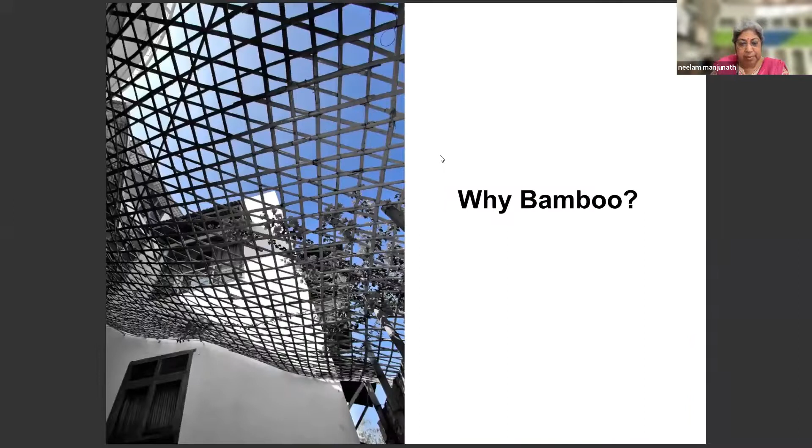This is a question that everyone, and I think most of us in the bamboo sector know, but in the architecture sector, buildings are actually the biggest polluters. As part of green buildings, we are doing very little, only 5.7%. That's why we probably need much more different kinds of materials.

Housing is another very big problem we are supposed to be addressing. Our Prime Minister had said by 2022 we will have house for all. Unfortunately, this 'house for all' has more of us talking about pakka structures, which always talk about concrete and steel and not about mud and bamboo. When we try to solve the housing deficit with concrete and steel, we don't have enough resources.

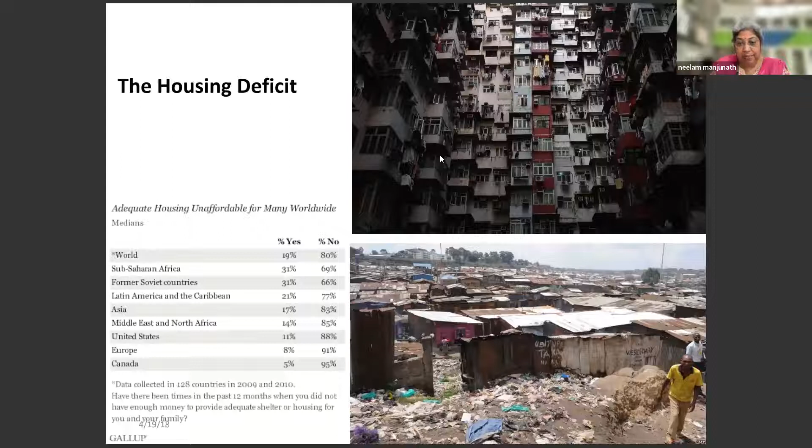Bamboo is a traditional material, so most artisans and people have known this, and know how to work with the material. So it's very easy to reintroduce. For us, it is very easy to reintroduce the material because, though the skills are slightly forgotten and there's a gap of some time, through my experience I have seen that they can be worked upon again.

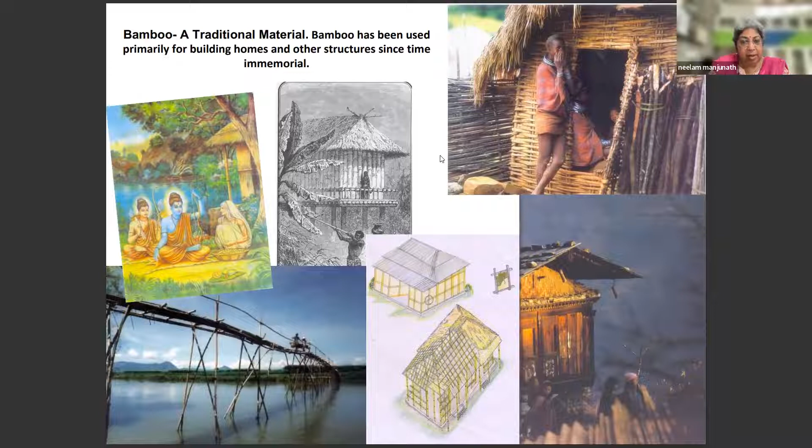The other various typologies in different countries—these are actually all from India for that matter. We have from northeast to Kerala to Assam to Andamans, these are all different kinds. So natural materials will always have different typologies.

Unlike cement and concrete, where one typology fits all is generally the mantra—a universal or global solution—when we use natural materials and natural technologies, we really have to be very regional and very respecting of that, so typologies actually change.

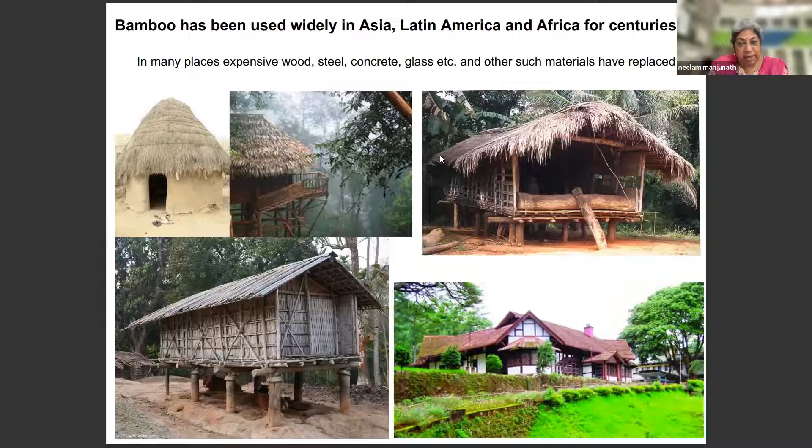Some more typologies: the bottom left one is from Kerala, the right one is from Nagaland, and the top one is from Gujarat.

I will not go much into detail, but as I said, bamboo grows very fast. It is locally available in most parts of India, and even in most parts of the world, except for Europe—and there too it has been sensibly introduced. The energy for transportation can be saved if we don't have to transport the material for far-off distances.

It's light and hollow, very flexible, very good in tension and compression. Its tensile strength is very high. It is prone to splitting, but that makes it easy to turn into mats and other boards. Because of that, it has better thermal conductivity than even wood. Its outside skin is very hard because it's got silica, so it protects against various kinds of diseases and other onsets.

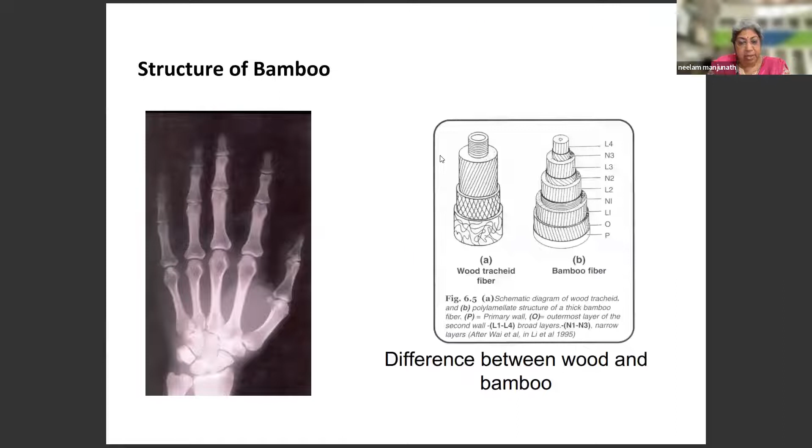These are the structures of bamboo. I think you can run through these. We will just quickly go through examples of bamboo and mud multi-storey buildings from India, different types of it.

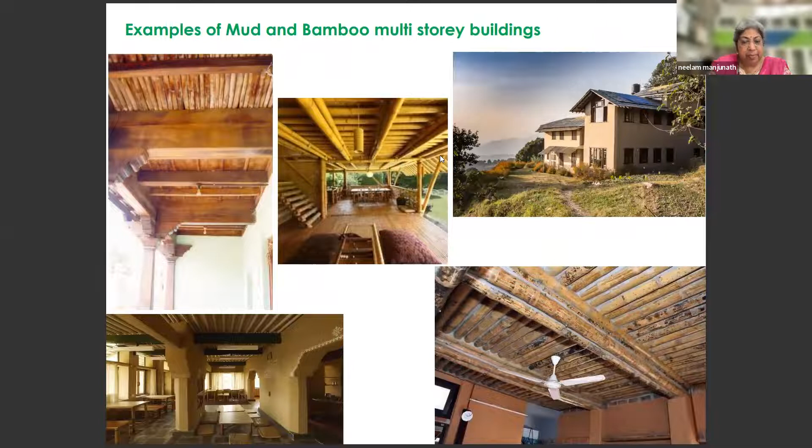This is an important slide telling us how sustainable bamboo is. To produce one unit of building material, how much energy is required - that's what we call energy balance. As we can see here, between steel and concrete, steel and bamboo, steel and wood, you can see the kind of ratio we have - steel being 1,500 and bamboo being around 30, almost 50 times less.

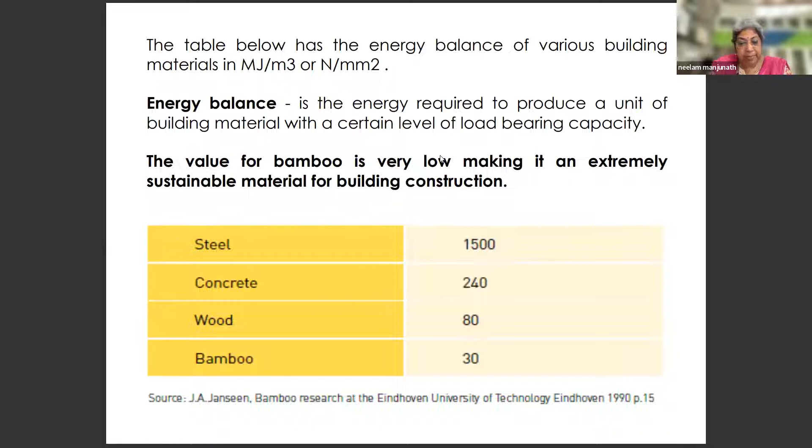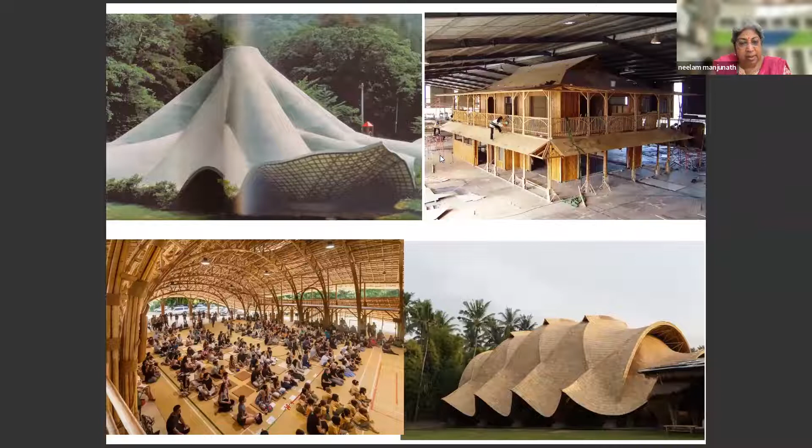These are from Simon Velez and Vo Trong Nghia from Vietnam and China, two different places, and they have been using bamboo for various kinds of purposes.

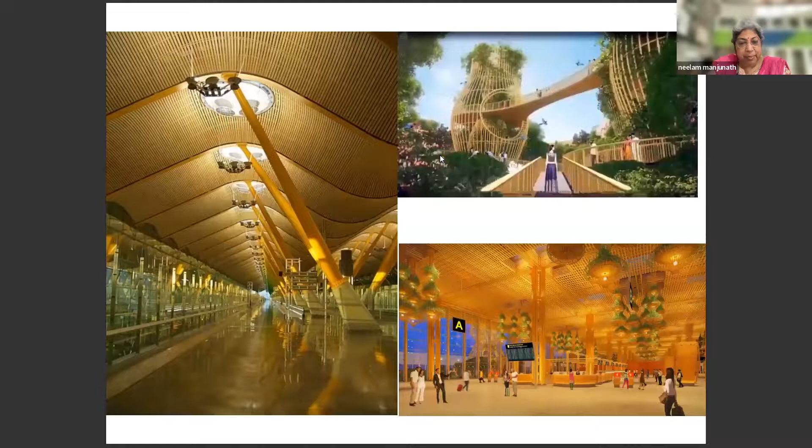The left one is the Madrid airport by Richard Rogers, used for the false ceiling. The next bamboo building on the right bottom is the Bangalore International Terminal, airport terminal, which is going to be finished and inaugurated very soon, with a lot of bamboo used in the interiors.

I'm very happy to share that I was part of the SOM project - the first time they reached out to me in 2017, they wanted to know whether bamboo could actually be used for a large transportation project like an airport. We had Ben Calden and Blake Sooth, who had contacted me, and for almost 2-3 months they sent these designs to me. We talked about fire resistance and other properties of bamboo, and availability of bamboo in India. They told me they would get back to me once they convinced the client with the data I provided.

And I'm very happy to see that they didn't get back to me - well, not very happy to say, but I'm happy that the building has come up with a lot of bamboo used, though not for structural purpose, only for the interiors. Nevertheless, this will be the largest usage of bamboo in any one particular building, other than Madrid, even more than Madrid actually.

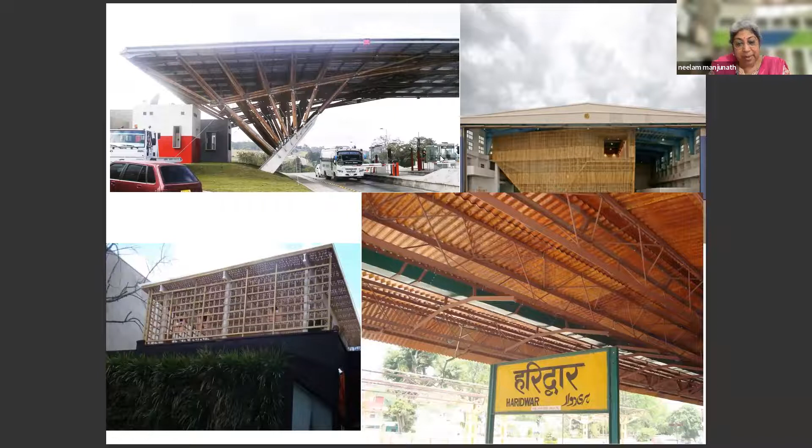In interiors, bamboo has been used for different kinds of purposes. It is being used for lots of applications, and traditionally it was also used for bridges - even now they are used.

So this is how we have done it - design, test, document, design, test, document. This is what I have been doing since 1999, from my first project onwards.

I will request Tejas to quickly run through that, because then I would like to talk about bamboo more. This is my first project, at the Raj Bhavan in Bangalore, a small pantry building and a toilet made with bamboo and mud.

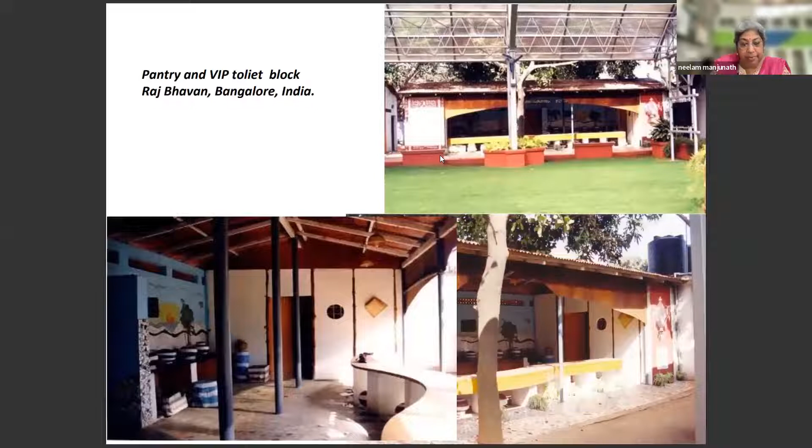This was done with IPIRTI, where we did this 2 BHK house. What I'm trying to show you through these projects is the variety of ways bamboo can be used, although it is not being promoted in that manner, which is what I feel. Because of that, we are not able to mainstream bamboo, and that's why I keep running through these projects every time I speak.

So this is a house, done in 2003. It was finished, and a lot of people have visited this place. They are using it as a club.

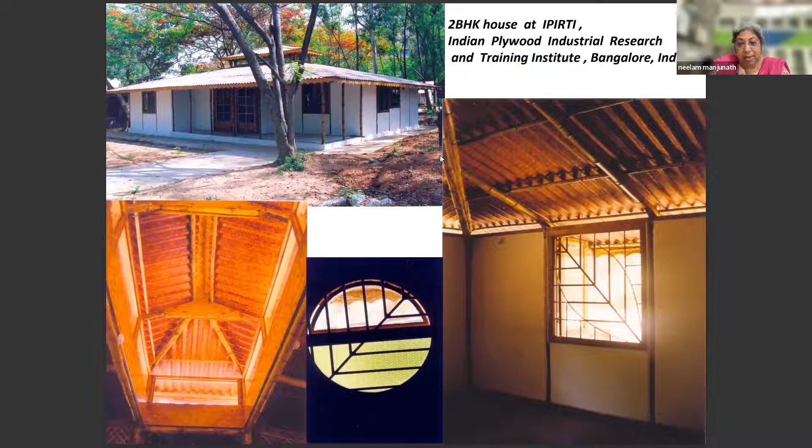Same project. This was 2004-2005, after the tsunami. With Seeds India, we did this prototype with bamboo and mud, and also with coconut trunks, since a lot of coconut trees had fallen, and we thought it would be good to use them in the building.

This was not built by us; we did the training. Bamboo can be used for disaster management, as an interim measure, and also as a post-disaster rehabilitation program in a very effective manner, though that part is still not exploited properly. We spent a lot of time with the Planning Commission to introduce this, but somehow we were not very successful.

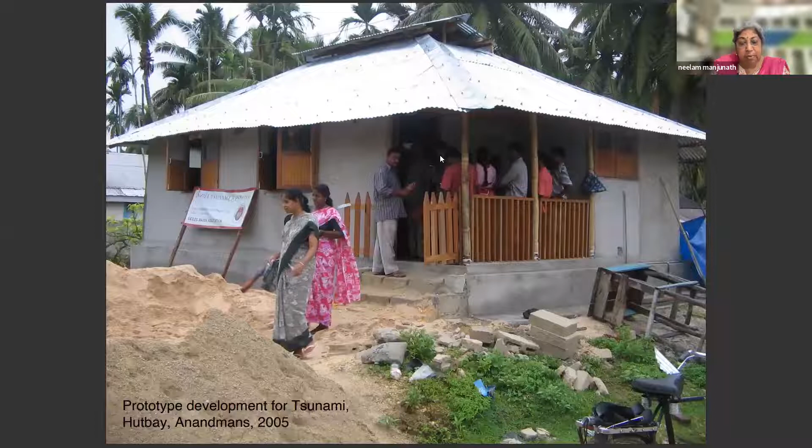This is the energy park, which is no more, thanks to permanent buildings taking over the whole campus. Everything here was done with bamboo, because it's a low energy material, and since it was an energy park, we tried to use that. A lot of people would visit, and this was supposed to be a showcase of the versatility of bamboo.

So we did bridges, and many different kinds of structures — even furniture, a waterfall, a chandelier kind of thing, sofa, dining table, bed, all the furniture we tried to make. Also different kinds of gazebos, bamboo used in landscape, and bamboo-crete — very different usages of bamboo that we tried to showcase in the whole energy park.

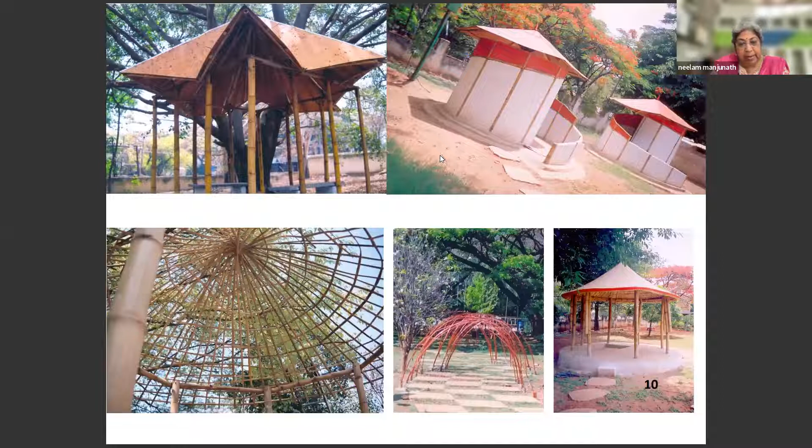From 2005 to 2010, we had this bridge that we built for Yamuna Biodiversity Park in Delhi. It is still existing, though slightly shaken, but it's still there. This was about 50 feet, and along with this we did other structures as well.

This is a toilet block, and we also did a gazebo out there.

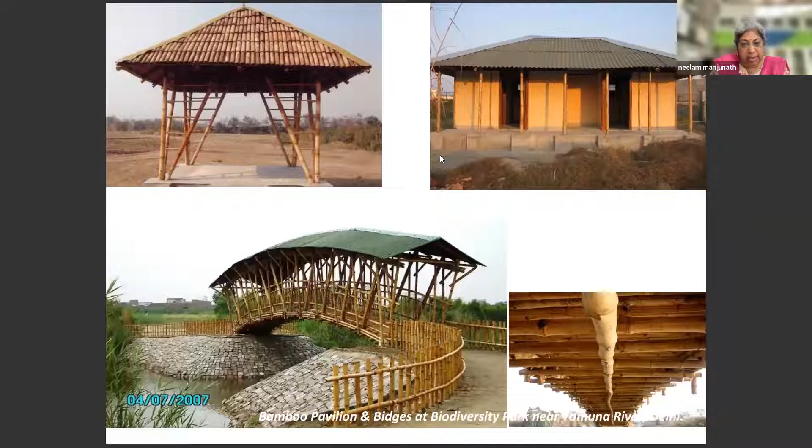This was a competition, and after that I think this project was abandoned. This is a shell structure. I started imagining this because bamboo is a very lightweight material, while people were using high-energy materials to cover large structures and large spaces. So I thought, if we can do it with bamboo like a shell structure, we would be saving a lot of carbon emissions. That's where I proposed this — we were the runners-up for this particular competition.

This is the way the whole thing was set up — it is part of a lake which was filled up.

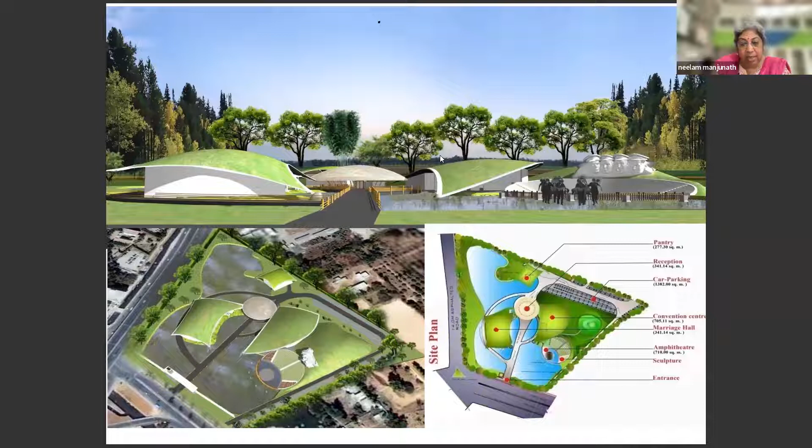And so we had a proposal of rejuvenating the lake and making it into islands, building on the islands for that. Next, this is, I think, the only bamboo museum in the country, in Palampur, Himachal Pradesh.

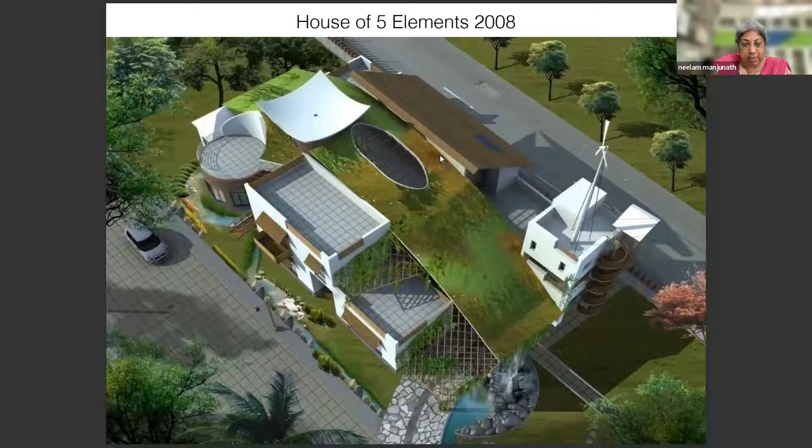This is my House of 5 Elements, which I built in 2008, built with stone, mud, and bamboo. These are three materials which are available everywhere, so I have been trying to develop a vocabulary with this material of our architecture.

These are the photographs, you can keep running through pages. This is all mud with lime wash and bamboo. Bamboo is there in all different kinds of forms in this house.

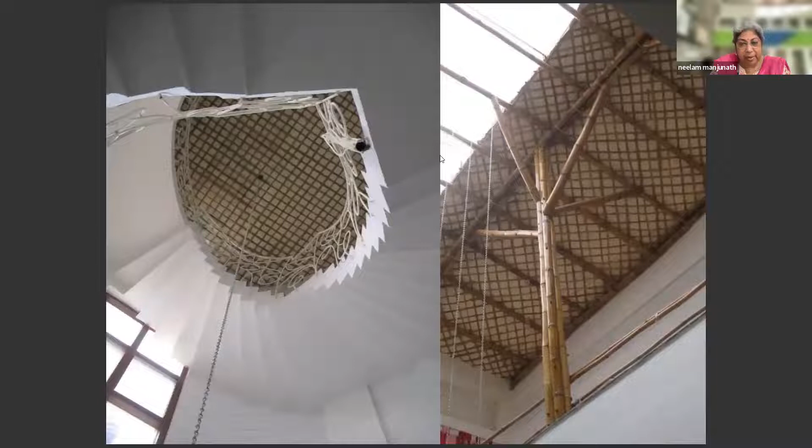From pergola to roof to bridges to different kinds of things. The first floor, the flooring, the walls.

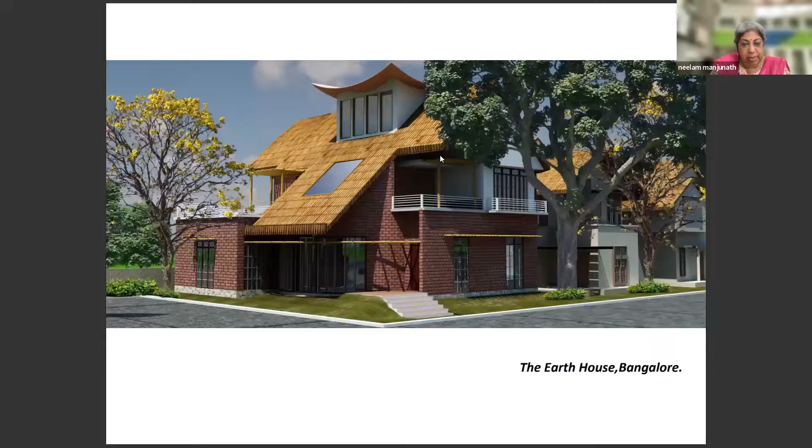The furniture. This is another house in a similar manner that has been done on the same campus, again with the same vocabulary, mud, bamboo, and stone.

In Bamboo Symphony, in 2010, we did our office from all the waste that we have from my house. This is Bamboo Symphony. In my house I had bamboo outside, there's a whole big shell roof that was done in my house. In the office, I have done a free-form roof with bamboo as reinforcement inside the slab, so what you see there is a free-form slab.

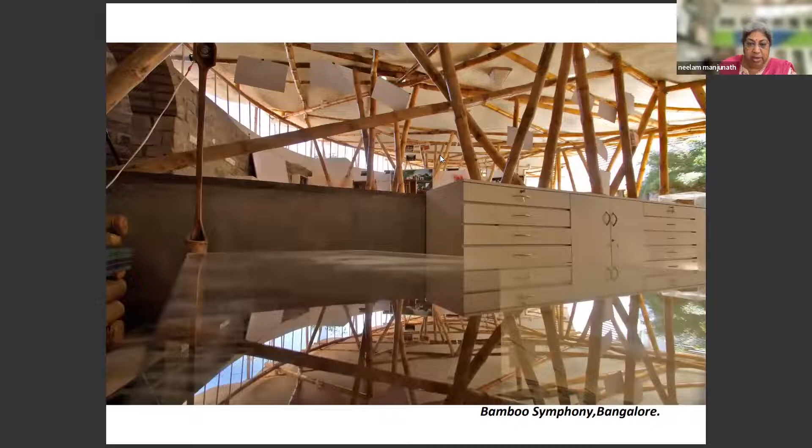Yeah, so that's the office. It's an open office. All these bamboos that you see, this is not part of any interior. These are all structural members in the office which actually carry the load.

And if you have seen, the slab is actually 4.5 inches, it's not a thin slab as well. So all these slender looking dancing bamboos actually take the load of a proper free-form roof of 4 inches over them.

Yeah, these are some other shots.

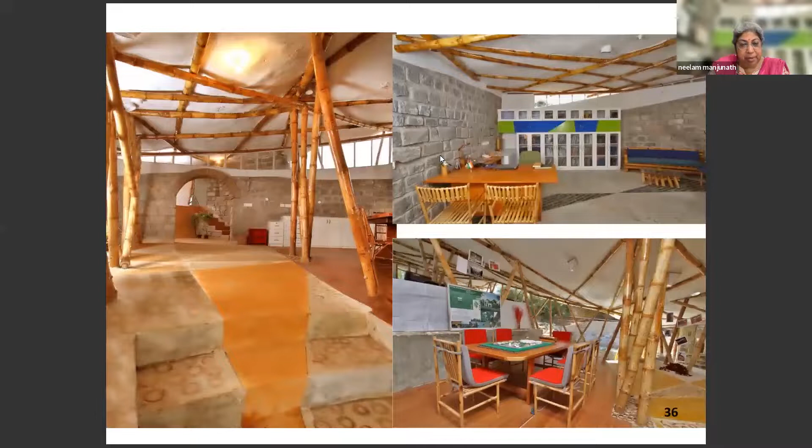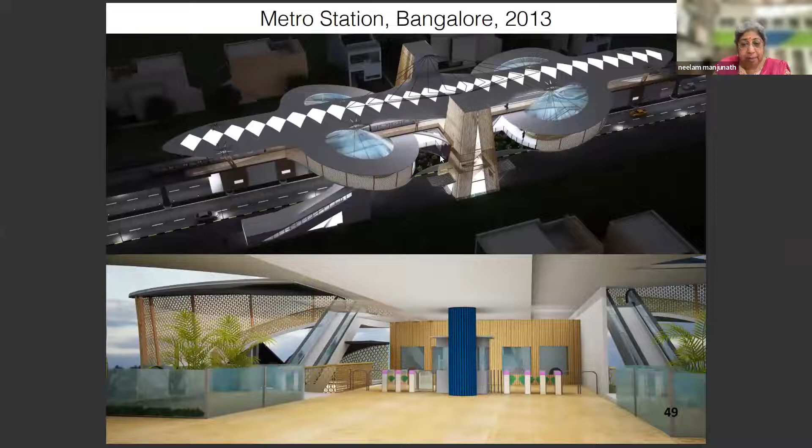By this time, we had sort of matured in the way we thought, and we could almost go further. So we were invited by BMRCL to propose metro stations with bamboo in 2013, and this is one of the proposals which also won the Rethinking the Future award. We had a lot of discussions, but after that, in the fire audit, they actually rejected bamboo, something like that, by the technical director, though the chief engineer was convinced, and it did not happen.

Just to mention, there were three different options that we had proposed, and this was with the debris that they generally produce a lot of from underground tunneling and things like that. With that, we also thought to use it with bamboo. So mud, debris, construction waste, bamboo and stone, that was the kind of material palette we had proposed for this.

As I just shared, this project is still under process and pending, but the other proposal for usage of bamboo in the Bangalore International Airport by the same government has been cleared. So I would really like to pursue this further, because now we have a case that we can use bamboo for public buildings in a very large capacity.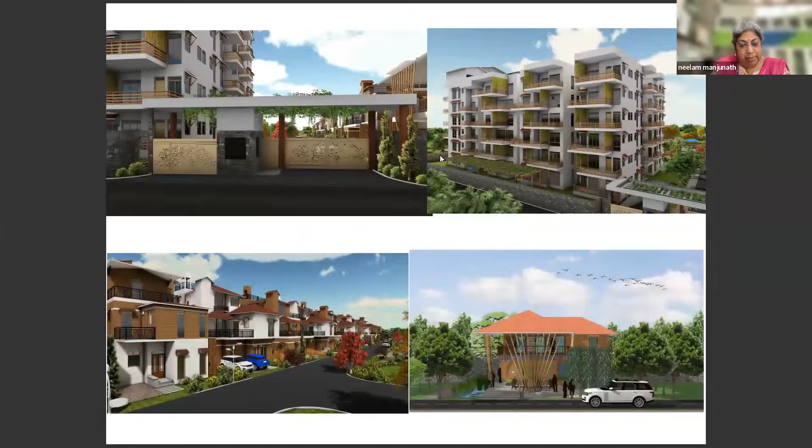This is a project which is going on. A lot of work is already done, this apartment block is already up. The photographs have not been put in here, but our clubhouse is about to go up.

This is Avilala Ecological Park, this is from the Andhra Pradesh government. Actually we got this near Tirupati, and we got it through a tender with architect Ravi Kumar, landscape architect from Chennai. Unfortunately, I think after Chandrababu Naidu went, the project has been slightly slowed down, and I'm hoping that soon this will again take off.

But here we had designed an interpretation center, which is like 30,000 square feet, what you see on the top. And next slide, we had this tower, which is a 150 feet tall tower that we have designed, and a skywalk, which you see at the bottom left, which was more than 1.5, actually 1.7 kilometers long.

So again, a shell structure. This is a shell.

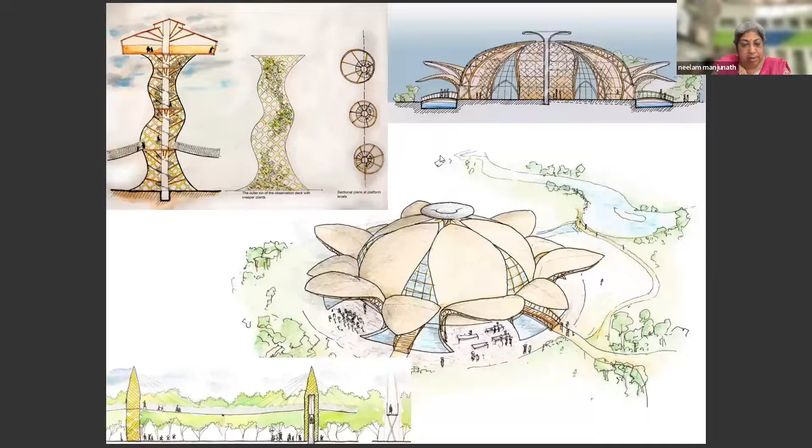This is again a live project, Metaslum, for the Bangalore Slum Development Board. We had taken a very different way of building, and bamboo is again a part of it.

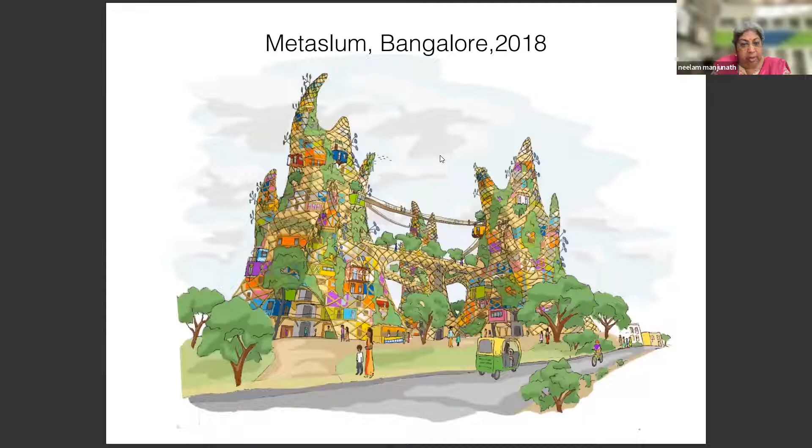We have a core, where there's a core of the lift and the staircase, and the slabs are done. After that, the spaces are given to people to build their own structures, through training and through the way they do in villages and other areas. That's how we thought they should also be building their own and covering the spaces, half covering the spaces, as they feel comfortable.

So this was one proposal. This also got a Rethinking the Future award for us for this slum development project.

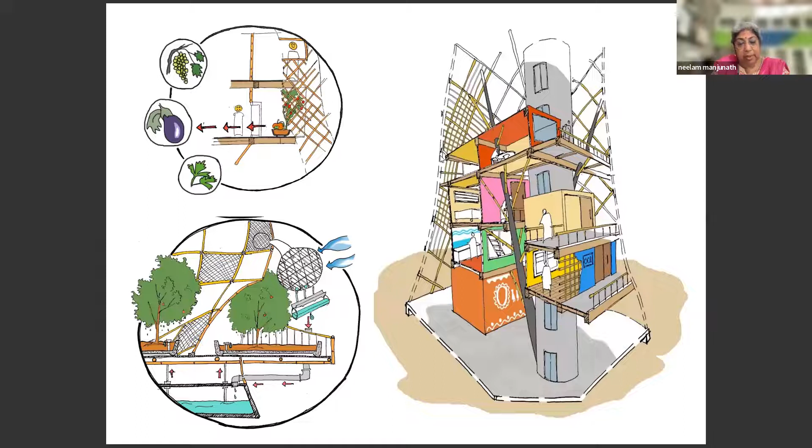This is another project where we went through a tender, in Anantapur, and it is going again slow. The project has been approved. This is for Shilparamam, the way it is there in Hyderabad, and the government wanted it in every district to promote the kind of handicrafts.

But we said, since buildings also need the whatever was the craft when the building was being used as a craft, it should also be promoted. And this is where we actually started the whole thing.

Next slide. Yeah, this is the interpretation center, which is a 20,000 square feet building with rammed earth and a free form roof from bamboo.

These are projects where you cannot use other materials, so it was very nice for us, because we had a very fulfilling time designing it with various natural building materials.

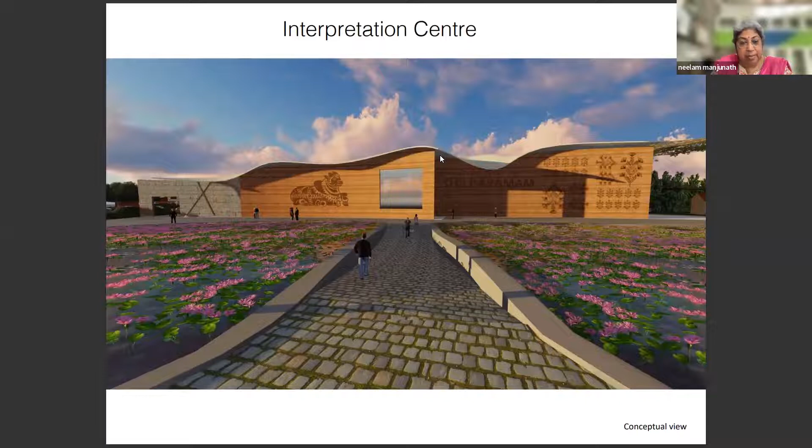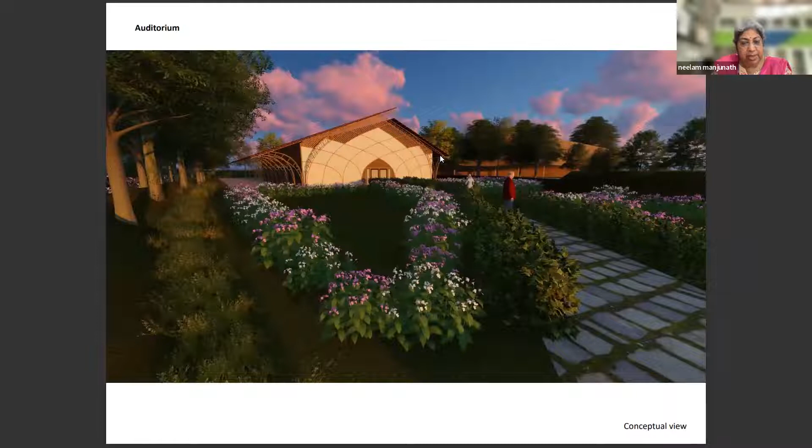This is an India Pavilion we did for a World Bamboo Workshop in Imphal in 2019. This is again, we tried a very different kind of roofing option on a shell, which has a 9 meter overhang on one side, and 7 meters on the smaller one.

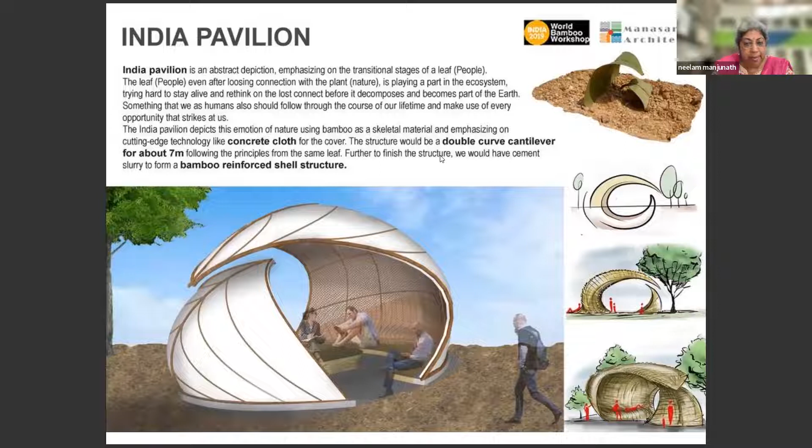This whole thing was done with a very different kind of roofing that we have tried here, with lime and jute, the jute fabric, and cement slurry with lime. And this, if you believe me, is 7 days work.

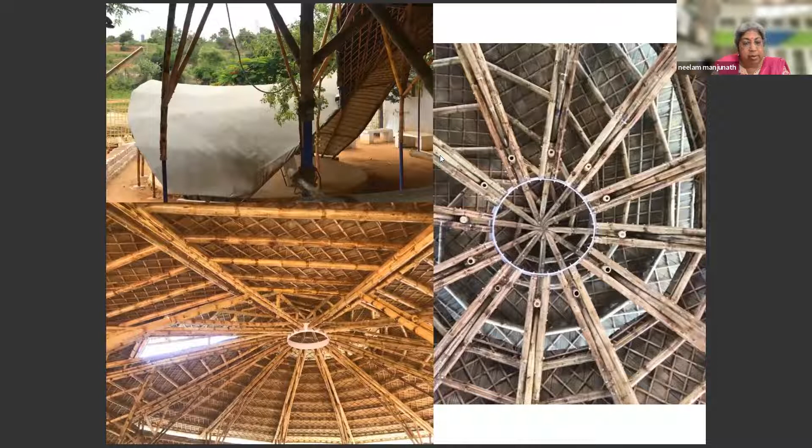With Dayalbagh University, from 2003, we have been doing a pedagogical journey, because we are more into advocacy. As much as we are in the building, we are also into advocacy. So it's more like walking the talk and talking the walk. It's not just that you talk about it, or that you get into business, but you also take people along and try to promote it in different sectors.

And that is how we try to do it, so with Dayalbagh University we have been doing this. The first structure, which you see on top, was a proof of concept for the university to start courses at the place. The left side bottom is the Agriculture and Bamboo Center. The right one is the Amritsar guest house at their university campus in Amritsar.

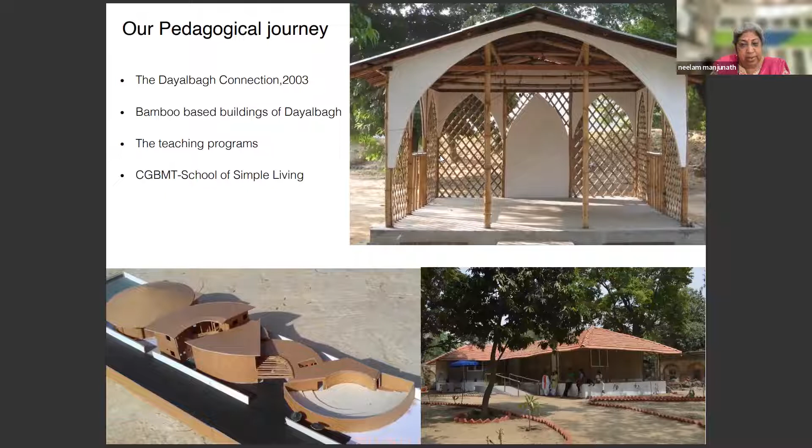This is the Amritsar campus. This whole guest house that you see is around 2,000 square feet, and that got completed in 18 days.

This is the state we did with mud plastering, mud flooring, and all these kinds of things. In 18 days flat, we did this whole construction, including solar tracking and all other furnishings that you see. Just to showcase how quickly we can actually do it, especially in terms of disaster housing, where people show very poor kind of construction that needs months together, this can be very easily done to a very nice finish in very short time if it is planned in a proper manner.

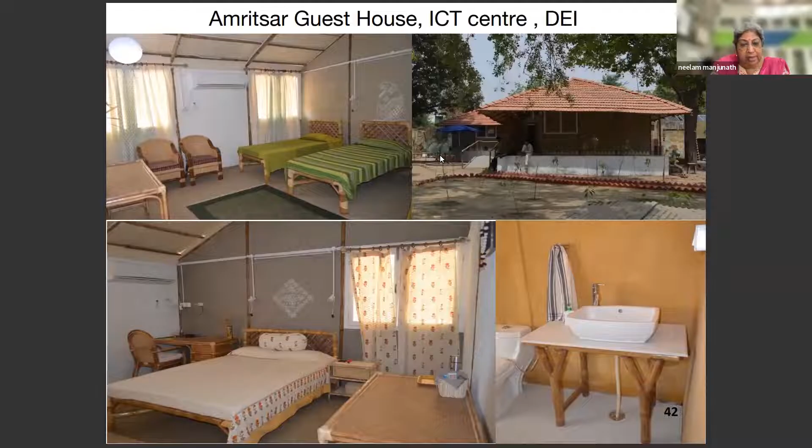This is a crèche at Dayalbagh University.

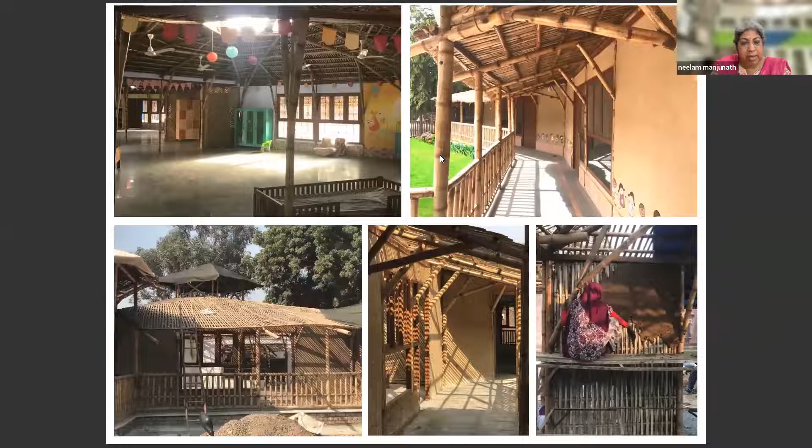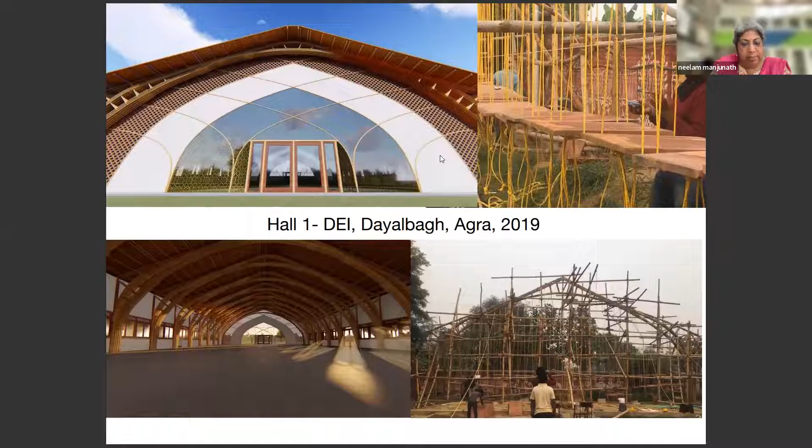In Dayalbagh University itself, we are doing two conference centers. This is the larger one, around 9,000 square feet in a single hall. It's still under construction right now for some testing. We're holding it just for a few months and will restart construction very soon. There was testing done on site.

This is Hall 2, which was under construction and has got finished. It's around 6,000 square feet with around 60 feet span across and about 100 feet length.

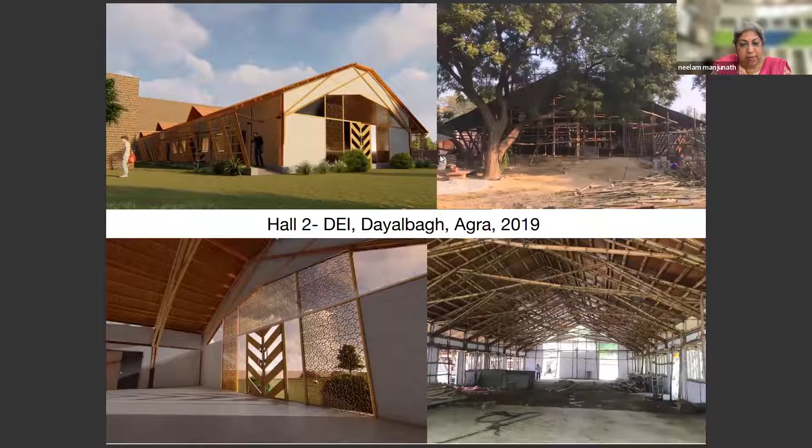This is how we do all the scaffolding inside when working on the structure.

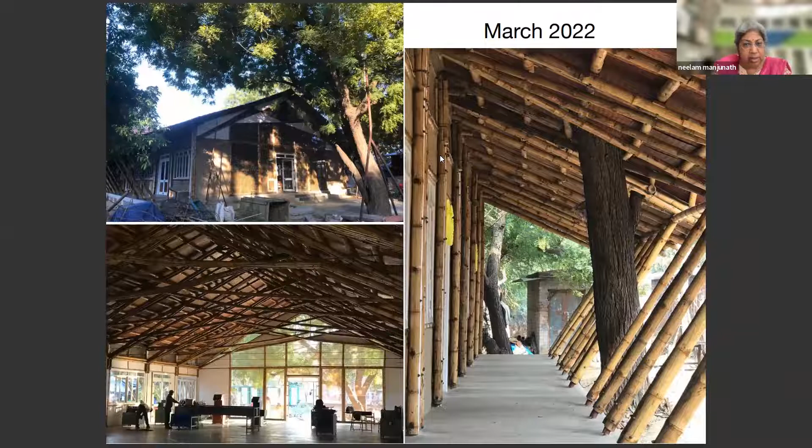This is the finished building. You can see the outside on the left top, and at the bottom this is the way the whole space is, with the side veranda visible. In March 2022, we finished it and handed it over to the university.

For the same university, we are also doing their Rajabari Bamboo Center in Madhya Pradesh, part of which is done. Further work was delayed because COVID struck right after the tender, and we could not finish it. Right now we are working on a small shed, but the main work is set to start very soon. This center is supported by the Madhya Pradesh Bamboo Mission.

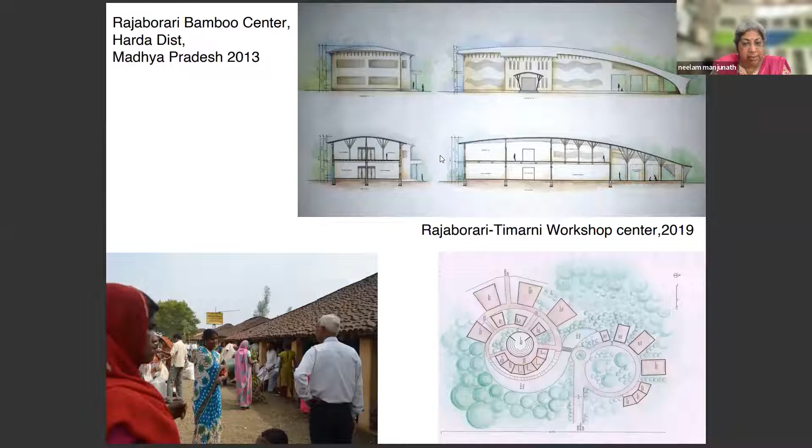Other than that, in Dayalbagh University a lot of different campus work with bamboo has been done. I'm very happy to say that I started something there, and they have taken it forward - the lady there, Molly Caprihan, who heads the architecture department at Dayalbagh University, has been doing great work in taking these things forward.

They've done beautiful products, as you can see, and even got a big award from the MSME sector in Delhi - the university received it. These are different kinds of products from them.

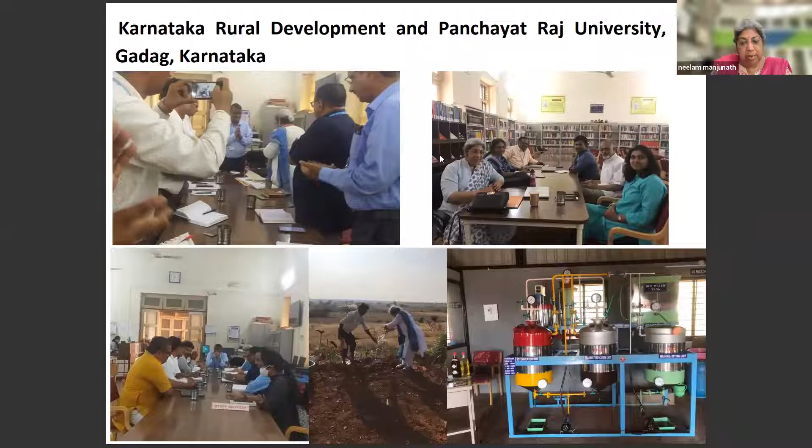We signed an agreement with KSRDPR university in Karnataka, which is one of its kind in the country. We have started work slowly - we did a biofuel project very recently and started with plantation. Very soon we're going to start workshops and other programs, with 2 courses beginning out of 4 total courses that will happen over a span of 3 years.

This is part of the visit I had done there, showing how they tried to build a small bamboo hut out there just to begin with.

This was another part of my pedagogical journey - a project we did with Trichy and Aarhus School of Architecture, Denmark.

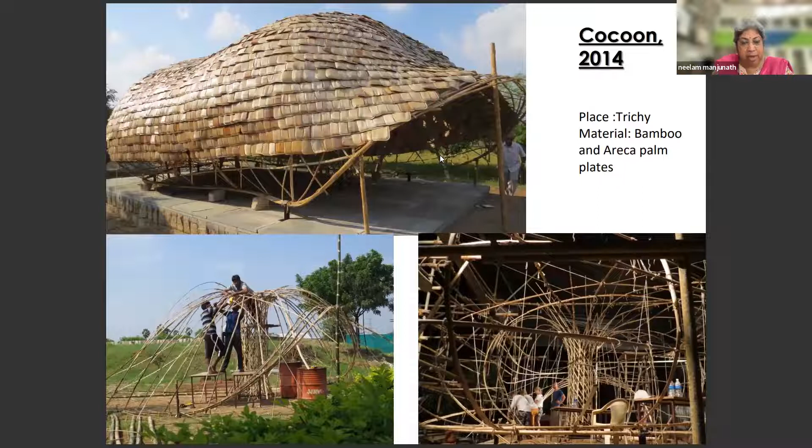We were shortlisted for the President's Medal by RIBA for this project in the student category, with Areca nut roofing shells. This has got multiple awards - we got the merit list award in 2017. Then recently we also had a Fibra Award, shortlisted for the Fibra Awards internationally.

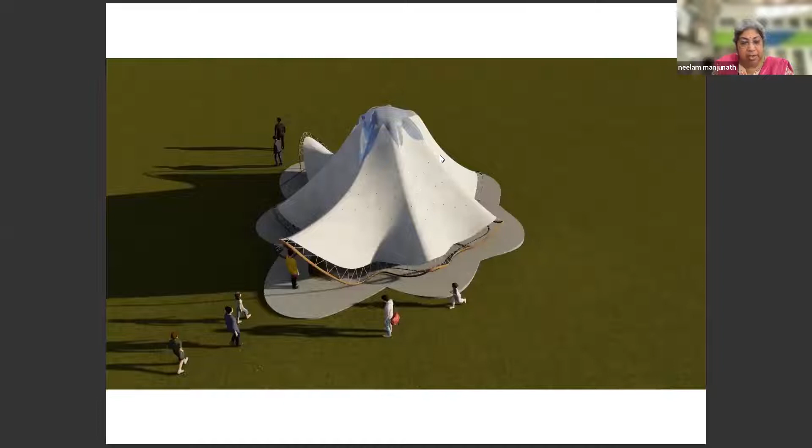This is another project we did in Maihar, another shell, because I'm really fascinated by shells with bamboo, and this was with mud and bamboo together.

These are different shots of the same thing where I tried to use a residency program with students and artisans together for the project, and I tried to get different kinds of stakeholders, along with artists, in collaboration to do this particular project.

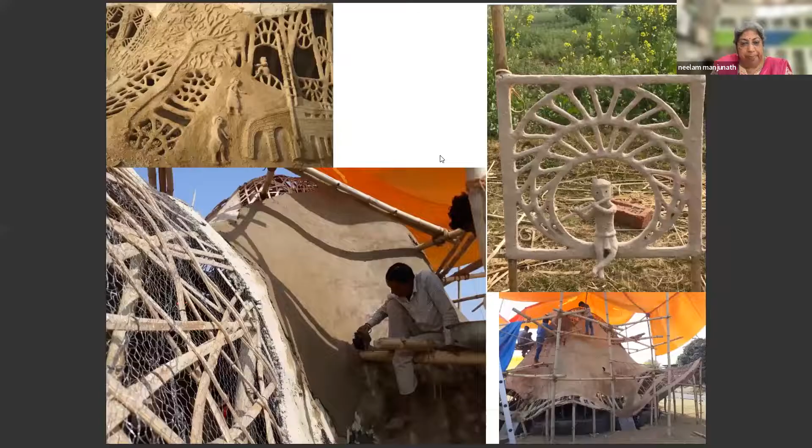These are some of the art forms of the place incorporated into the building. This was the building that came up at that time.

The other details - but unfortunately, I'm just trying to show these two buildings in the end. Both these buildings, we were going and coming and giving instructions, but the clients did not think it necessary to have a proper technical person at the site for execution. And because of that, some very minor silly mistakes were done, which brought the structure down. So these two buildings which I showed in the end, they are not there at the place anymore.

I wanted to emphasize that bamboo is not being looked at as an engineering material, a proper material which has got engineering properties. So even when you are trying to do some kind of project, they don't allow you the amount of finance to have our own engineer in place on the site. And from their side also, they never take it very seriously as a material with engineering properties, which needs to be really handled in a proper manner, like any other building material. That has been doing a lot of disservice to the material actually.

If we charge more, they say bamboo building is expensive. If we charge less, we are not able to really maintain that quality - somehow I wouldn't say quality, but structural strength and structural integrity. That's the first thing that we have to actually achieve.

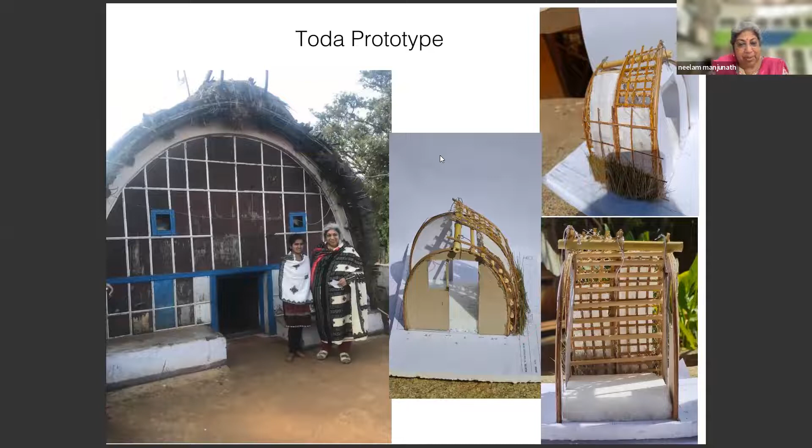And into the future, we have started our small campus at IVC Bangalore, on the IVC road in Bangalore near the Devanahalli airport.

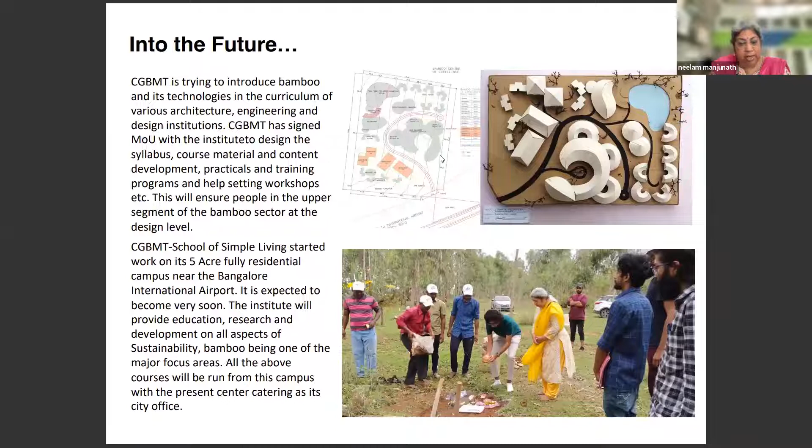This is the conclusion about bamboo.

This is the book that I was working on. Whatever you saw till now, in doing all this in the last 23 years, I have been documenting and collating the information because there was no information available anywhere. Every time I would start doing something, I would have to run from pillar to post - what bamboo, how bamboo, from where, how to do it, whether it will work or not, whether I can get a structural engineer, what should be the testing on the site and how should I test it. This was something I really suffered with, and I started documenting, thinking that people who come behind me should not face the same problem and reinvent the wheel.

So all these things, trying to push bamboo through colleges and all these places, and I'm really happy to see that a lot of people, a lot of architects are using bamboo. There are a lot of competitions where bamboo buildings are winning designs, and they're talking about these more and more in various forums. Looking at all that, I actually came upon collating all the data in the form of a book, which is more like a manual.

I have been sharing about this, that it is in 2 volumes right now, which we are giving. Can I have the next slide? Oh okay, keep the same slide. Okay fine. No, not this one, the next one. So it is in 2 volumes at the moment.

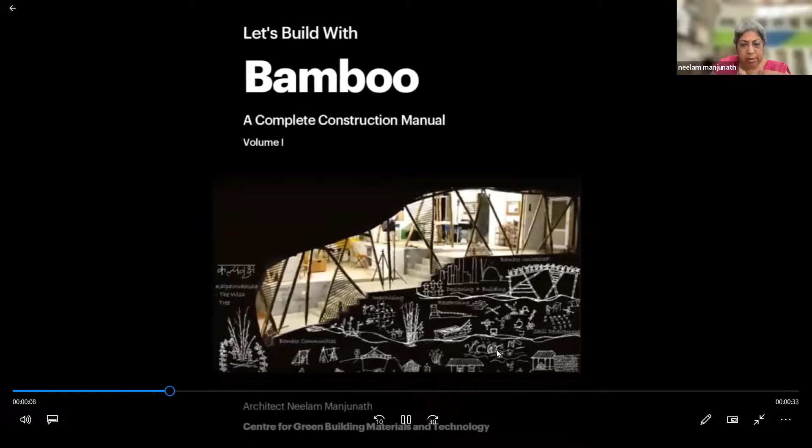Can you play it with the sound? Not able to hear it? I sent it just now. Can you hear the sound? No, we're not able to hear this.

Just a look of the book, actually. We got the first prints very recently.

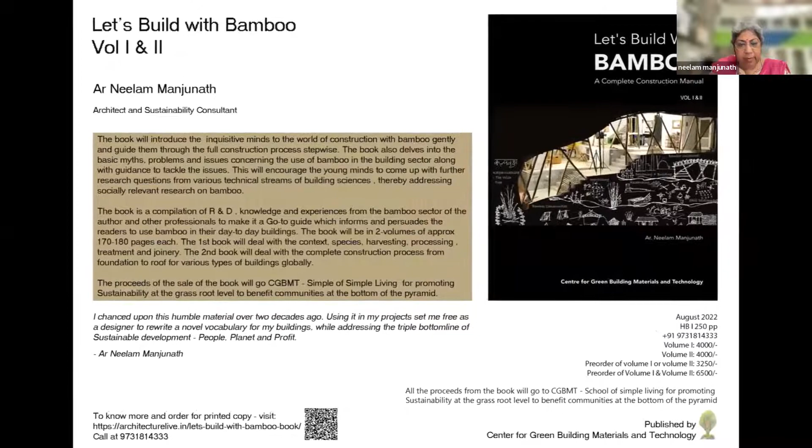You can pre-order the book. The book costs something, and for a pre-order we have a very good discount that people can avail right now. After printing, by December it will be available complete for distribution. The first books have just arrived, and I'm happy to share that the book will be launched at the IIA SRC. The chairman, Architect Mohan, has confirmed it will be launched there, and both volumes will be directly available by December. Thank you so much.

Thank you, Neelam madam. I think it was a very elaborative journey of your experience, and 80% of the works even I did not know about. You've been working in quite enormous ways and methods with bamboo, and you have given a lot of effort to build up this material on different scales. You've gone to private spaces, public spaces, and government authorities.

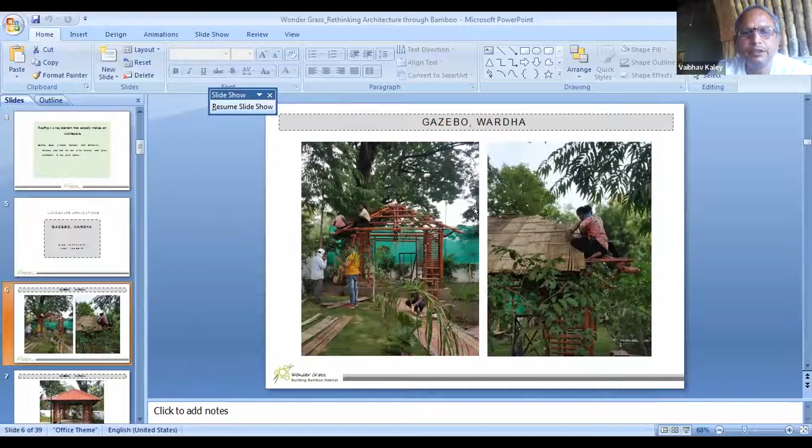So this is a gazebo structure. It is not big, about 12 feet by 12 feet with a pyramidal roof on top. The components are designed as prefabricated modular standardized components, sent on site, and the structure is installed and erected. My suggestion is don't look at the roofing material, because all the roofs we've made have color-coded GI sheets as the roof - look at the interesting aspect of the built structural system.

The most interesting part of my work, or our work that we do, is to resolve the construction system as well as articulate it in such a way that when you see the structure, that's where you get the most joy out of it.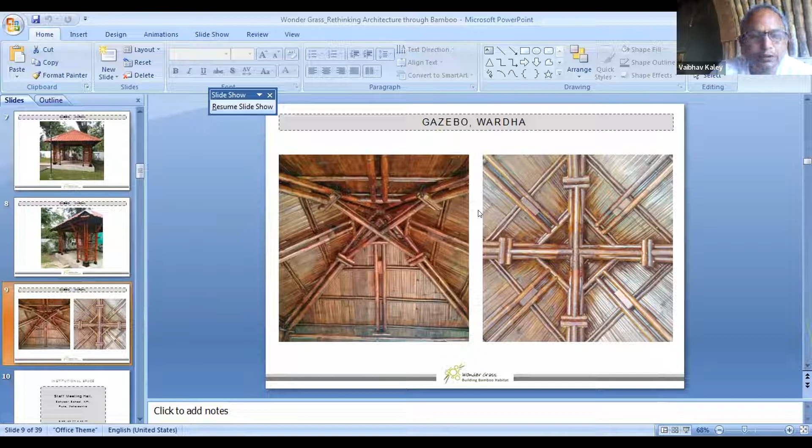This is a slightly bigger structure. The footprint is 32 feet by 32 feet clear span, and this is a staff meeting hall for a residential school, Sahyadri School near Pune, Maharashtra. So this is the structural system - again, the pyramidal roof.

What probably might be interesting is that because we wanted to create it - the 32 feet span is not such a big span, but we articulated the system. It is an inverted truss which is being used here.

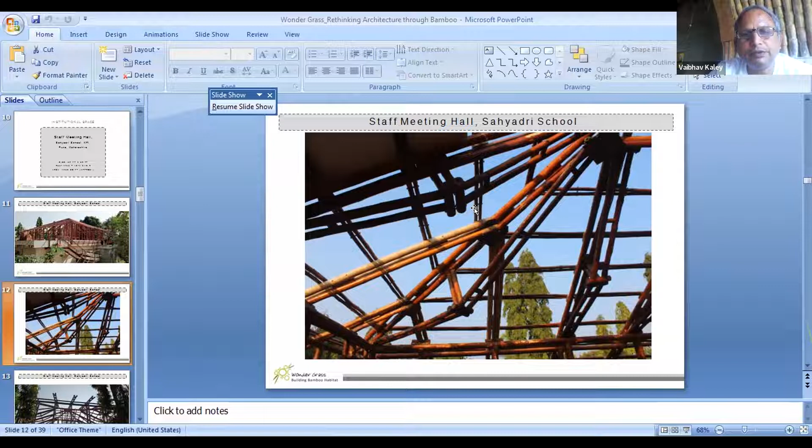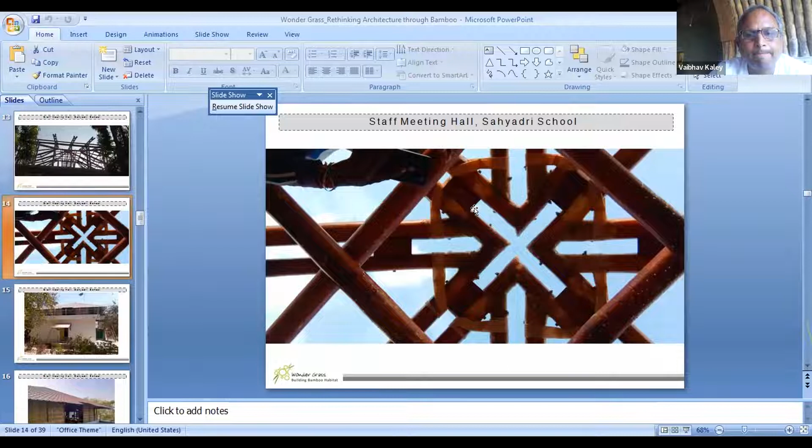This sits on top of an existing building.

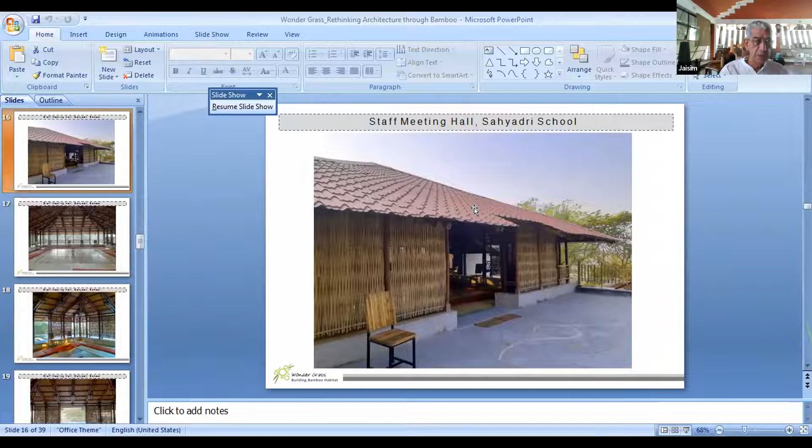Can you see all the slides now, Jaisim sir? Yes, we can see, no problem. Okay, perfectly clear.

So this is how it looks after finishing. It is a semi-open space. It was designed to be closed, but the space without any windows and any kind of walls looked pretty fascinating for the users, the school management. So they have kept it just like that.

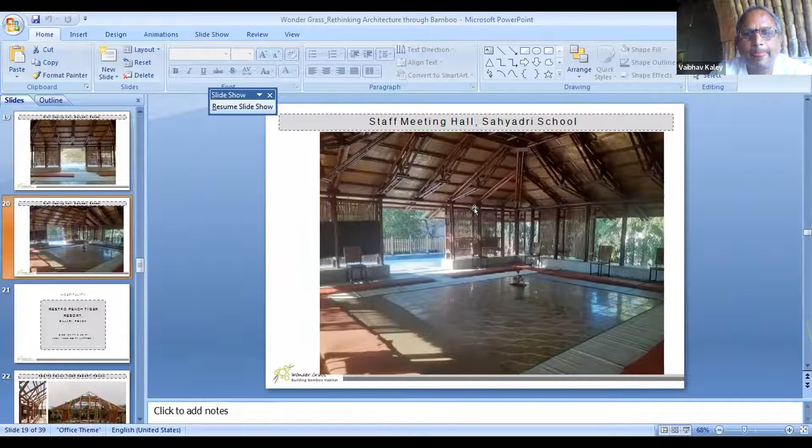This is a third building, just finished about 6 months back. This is a dining cum conference hall for a tiger resort near Silari. The roofs that we built generally have large overhangs because this is an area where you get a lot of rain, and most of these buildings want to have either semi-open or open format for a better structural and spatial experience.

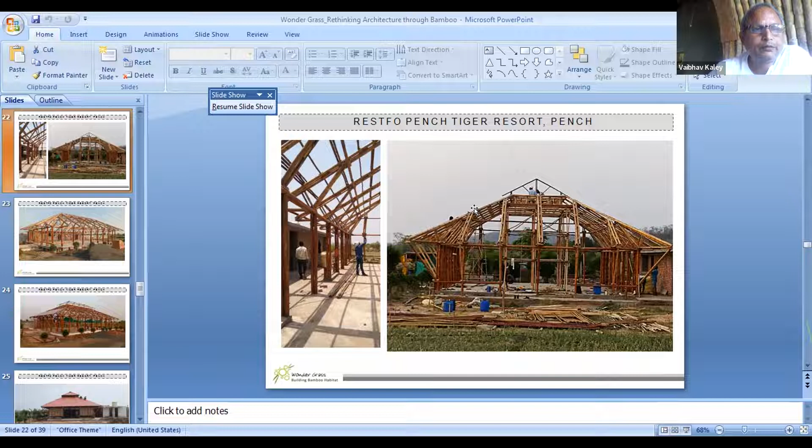It is a roof which is a split roof. The central portion is raised by about 2 feet, creating a ventilation gap in the center.

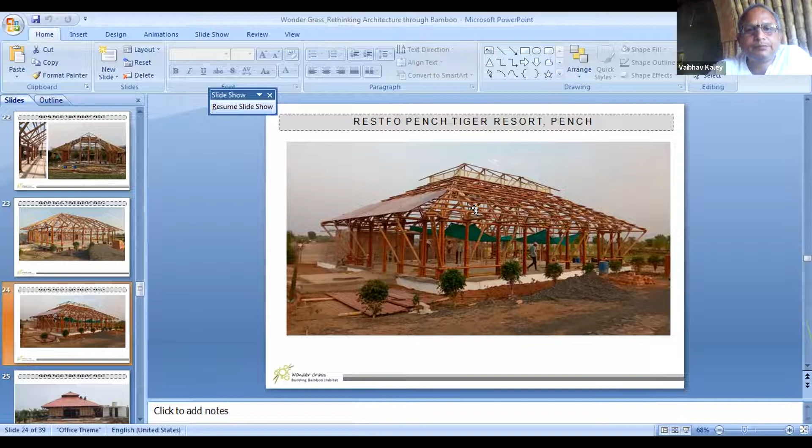The roof extends by almost 4 feet, with a clear span of about 32 feet by 54 feet, and the roof extends 4 to 4.5 to 5 feet on all sides. So if you look at the roof, it will be about 60 feet by 40 feet.

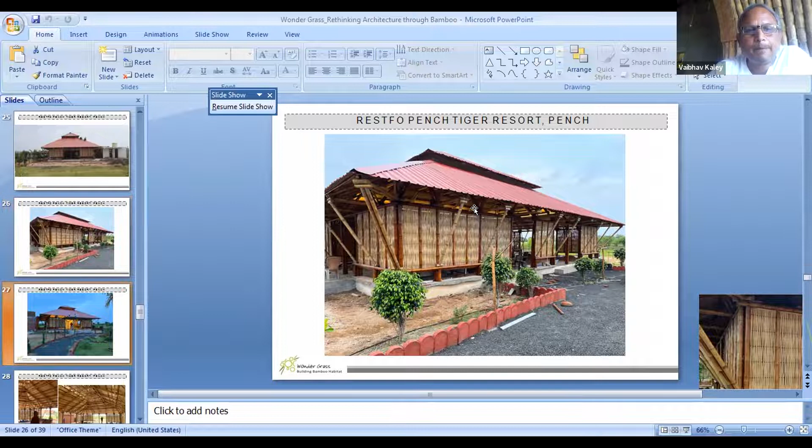So through these 3 projects, I wanted to discuss that many times by changing the material we want to use, and the inherent nature of the material, you might have a similar looking form, but the character of the built space will be entirely different. So it is not so much about rethinking bamboo, it's about rethinking the spatial and built character that we want in buildings being built in the Indian subcontinent.

And when we start thinking through this with that context as our framework, probably the spaces and buildings we come up with will have a completely different character. And once that starts happening, we wouldn't necessarily have to be bamboo-specific, bamboo missionaries. You just need to be sensitive towards that context and the kind of material and built form needed to create a space which actually responds to the context, using material and resources more in alignment with the climatic and environmental context, but also the social and cultural context of the place.

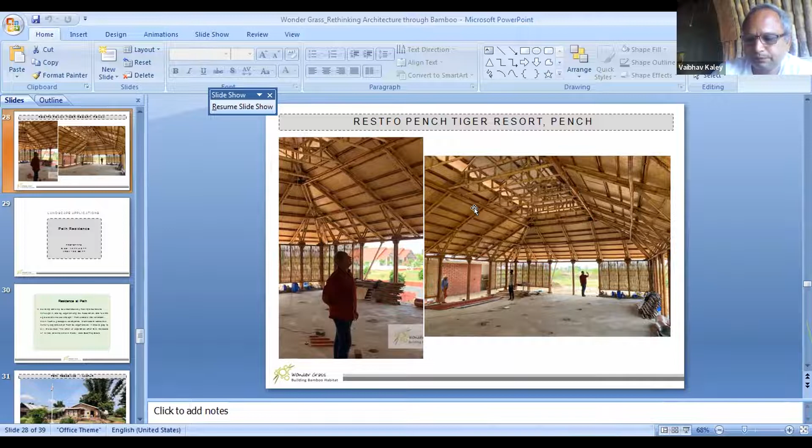Geoffrey Bawa has been someone from whom I have learnt a little bit. Not that I have visited his buildings, I have not had any experience of them directly, but from the pictures, drawings and case studies, I really like the kind of work which is very subtle, very non-intrusive, and yet when the building sits in that space and context, it becomes one, but also retains its own sense of being, which I think is a nature of this Indian subcontinent.

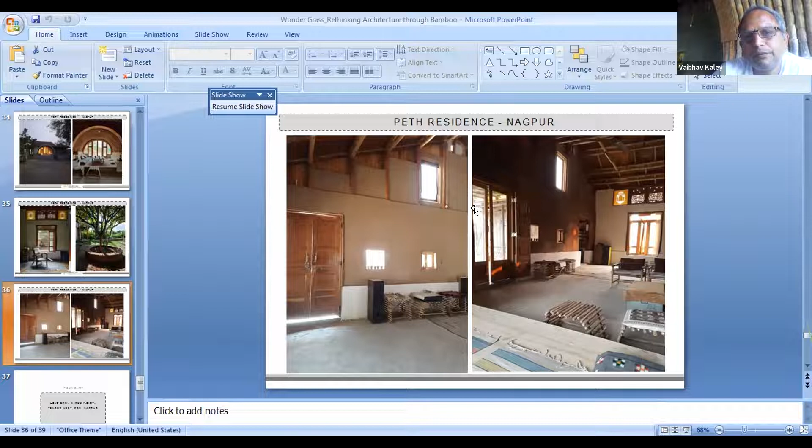This is the mud walls. The structure is all bamboo, and the walls are mud. There are two types of walls in this: the wall up to 8 feet is a rammed earth wall, but not exactly using the standard composition of rammed earth, and the wall above 8 feet is basically a wattle and daub wall. The structural system is all bamboo, coming from the roof all the way down to the bottom floor.

Okay, I think Hemang has spoken about the work and my father. I would have liked to speak a little more about him, because Neelam had suggested that I speak in detail about him. I wanted to put together a few slides, but I couldn't find the right photographs, and I needed some time to put together 5-6 slides, because unless I show some reference images, whatever I say will not really come through.

So it would not be doing justice to him or his work, so we'll just stay with one slide. For me, I am fascinated with this material because it gives me an opportunity to think about how to deal with it, given its huge challenges, then experiment with it and find solutions to build with it. There is a joy because it is a material which is very easy to work with, versatile, and gives you various possibilities. But at the same time, during these conversations with this material and these systems, the search for solutions can be extremely exhausting and daunting, and many times frustrating. So the cycle continues, but if you find an interesting solution at the end, that whole process of frustration and exhaustion actually gives you the energy to pursue and continue.

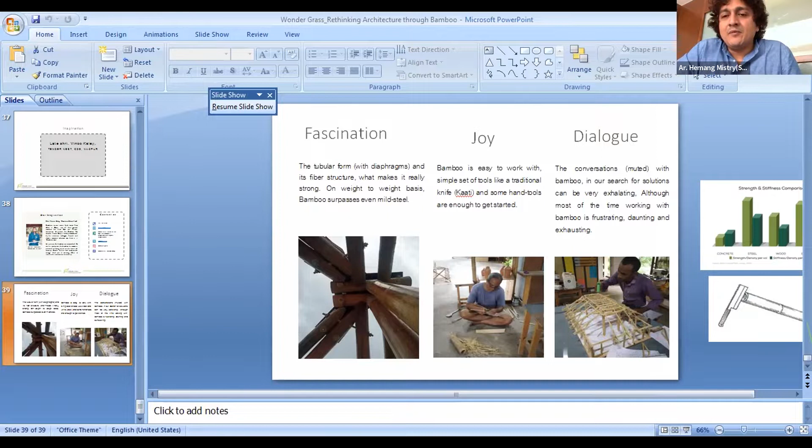Thank you, Vaibhav, for sharing immense knowledge on different ways of dealing with bamboo. It's quite grounded in terms of building up these structures and a perspective of looking at bamboo. Your company, Wonder Grass, I was just referring to the website, and it's quite interesting in terms of how you're looking at bamboo as an entrepreneurship, a one-stop shop. That is much needed these days, where you try to implement that material at a soul level, really substantiating its technicality and its sustainability. This forum is related to a similar scenario, where we are trying to combine architecture, design, and civil engineering, where these fields play an important role in how we implement bamboo as a material. It's not only a material, but an opportunity to move ahead for the future.